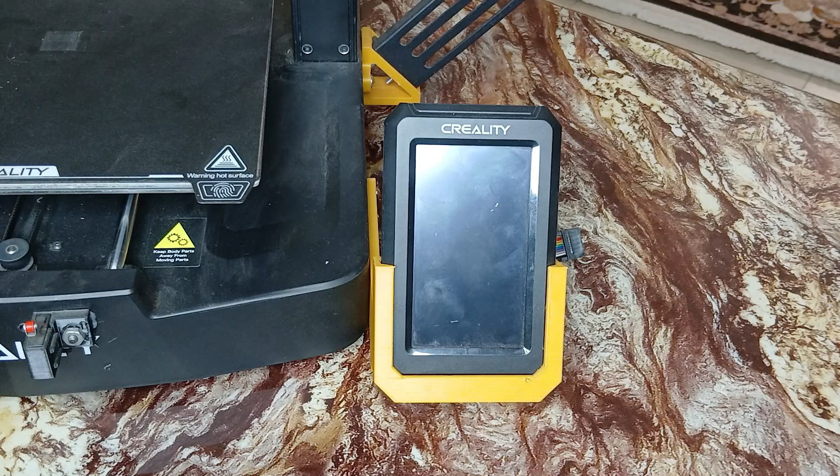In a previous video, I was showing you this mount I designed for the Nebula touchscreen for my Ender-3 V3 SE. But then I decided to come back to the stock firmware, meaning that I had to use again this stock screen, this TFT screen. So I designed this mount which I can use for this stock screen.

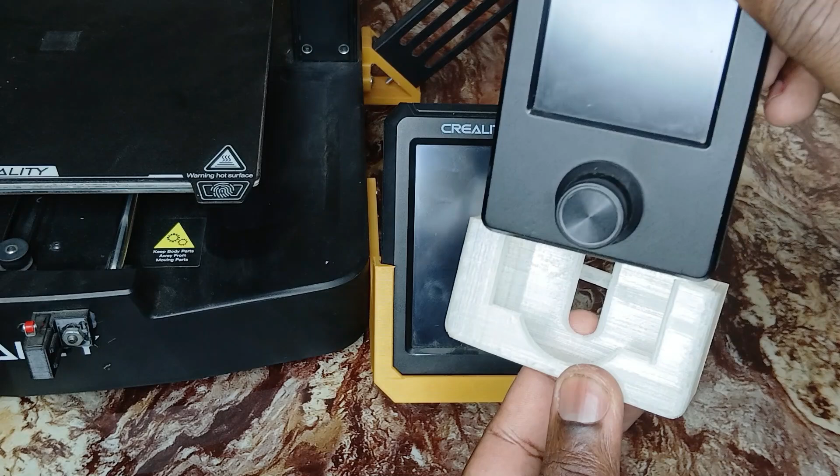But for some reasons, I decided to shift again and again. And each time I needed to unscrew the first mount and screw in place the second mount and so on. Of course, at a certain moment it became a little bit boring. That's why I decided to put aside this mount here, this one, and then I designed this new one for the TFT screen.

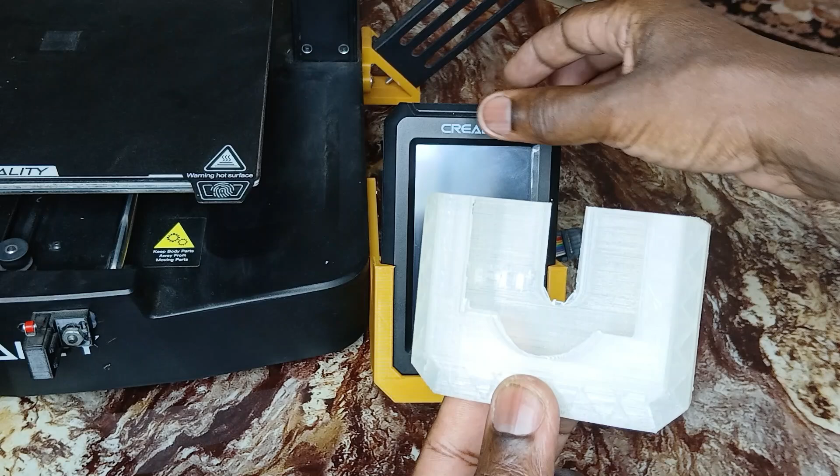Now, the way it works is very simple. I just remove the touch screen. I keep in place this mount, but then I will insert this one here. And then I can put my TFT screen. That's very easy, very simple.

Now, if I no longer want to use this TFT screen, I just pull it out. I remove this mount, and then I put my touch screen. As you can see, that's very simple.

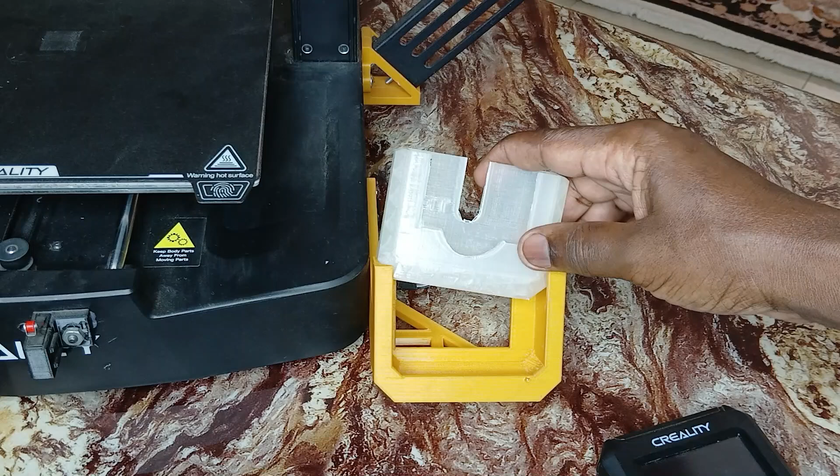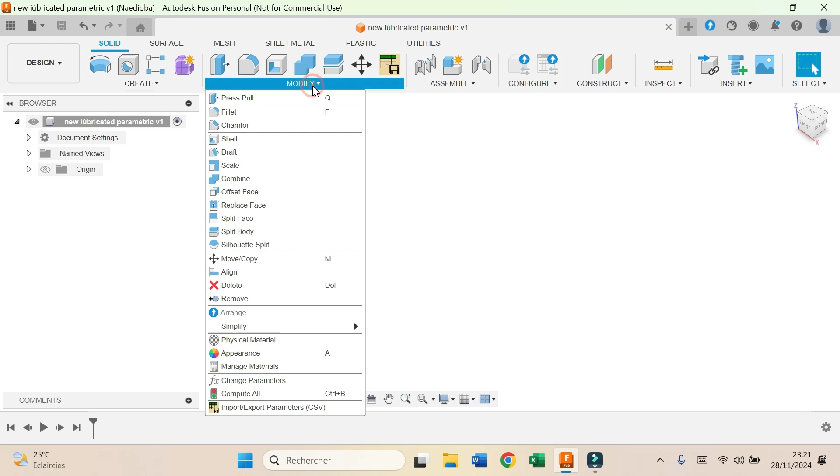Okay, now I'm going to show you how I designed this mount. First, I open Fusion 360. Now, before starting the sketch, I'm going to create a few parameters. The first parameter I'm going to create, I call it forAngle. This is the parameter that will handle the angle of the tilt of the screen. I choose no units and I type in 50.

The second parameter I'm going to create is the angle. And here I'm going to use if statements. I type in if, parenthesis, forAngle is inferior to 40, semicolon, 40. This means that the minimum angle allowed for the tilt of the screen is 40 degrees. If the angle is less than 40 degrees, it immediately puts it to 40 degrees.

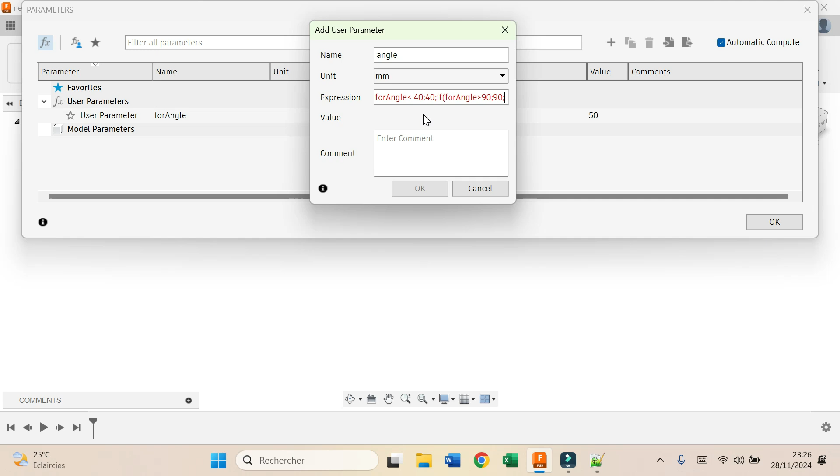Then I type in again if, parenthesis, forAngle is superior to 90, semicolon, 90. This means that the maximum angle allowed is 90 degrees. Else, in all other cases, the angle is equal to the value we type in the parameter forAngle. So I type in forAngle here and I close the parenthesis.

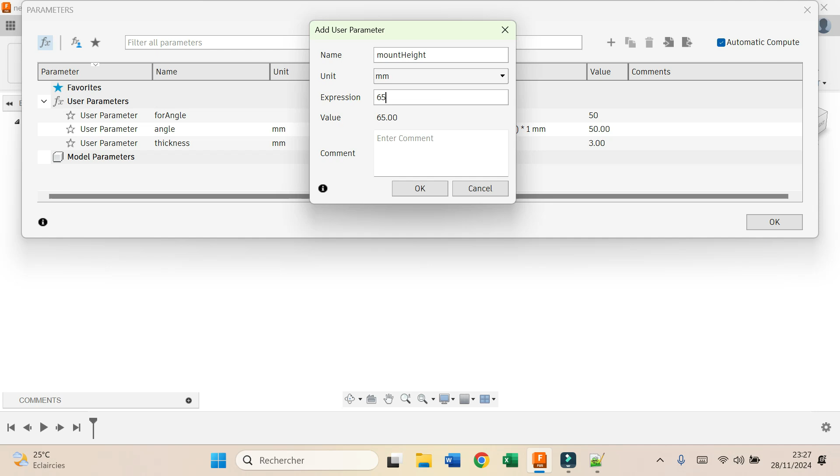Now the next parameter is the thickness of the mount, thickness. And I type in 3 millimeters. The next parameter is the mountHeight. I type in 65 millimeters. You type in 65 millimeters. Okay.

Now another parameter is the ribPlane, that is the height of the construction plane on which I will create the rib that will strengthen the mount. I will call it ribPlane, and here also I will use an if statement. I type in if, parenthesis, the angle is inferior to 50 degrees,

the height of the plane would be the mountHeight times 0.75, that is 75% of the height, semicolon. Otherwise, the height of the plane is equal to half the mountHeight. So I type mountHeight divided by 2. Now I can close the parenthesis. Okay.

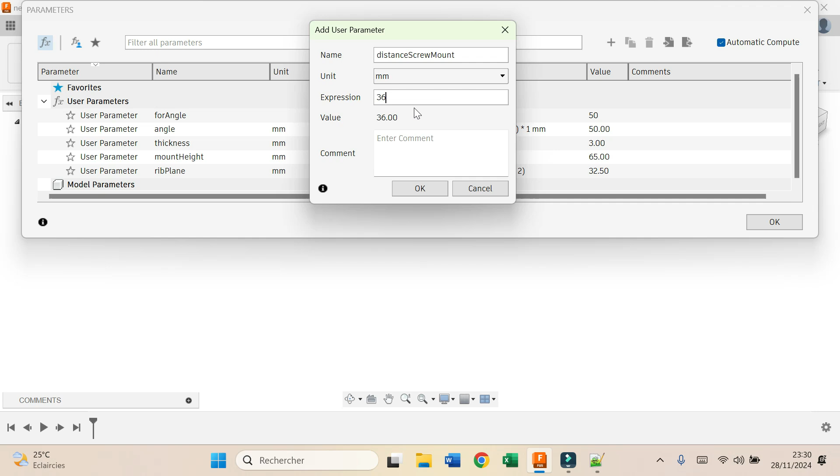And the last parameter I will create, I will call it distanceScrewMount. This parameter will handle the length of the screw bracket. If I want to have it longer or shorter, it depends on this parameter. So here I will type 36 millimeters, and now I can finish the parameters.

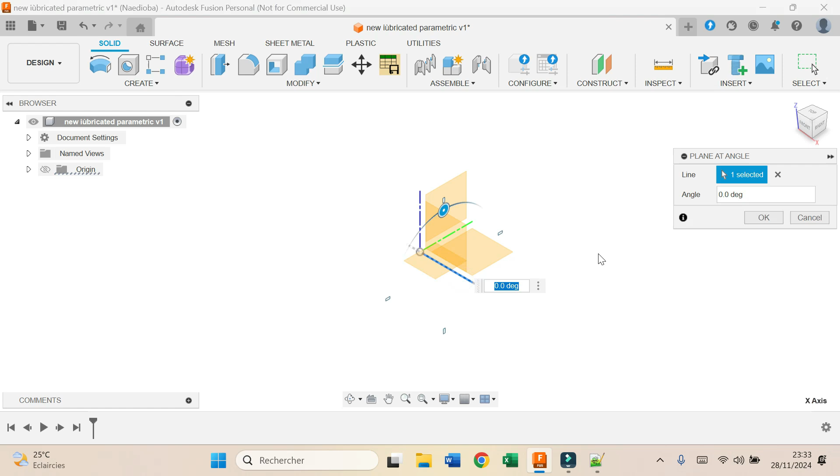Okay, now I will create a plane at an angle. I select the x-axis and I choose angle in the parameters, that is 50 degrees. I click OK. Now I create a sketch on this plane. I draw a rectangle. I show the origins. I make these two lines symmetric around this axis and these two symmetric around this axis.

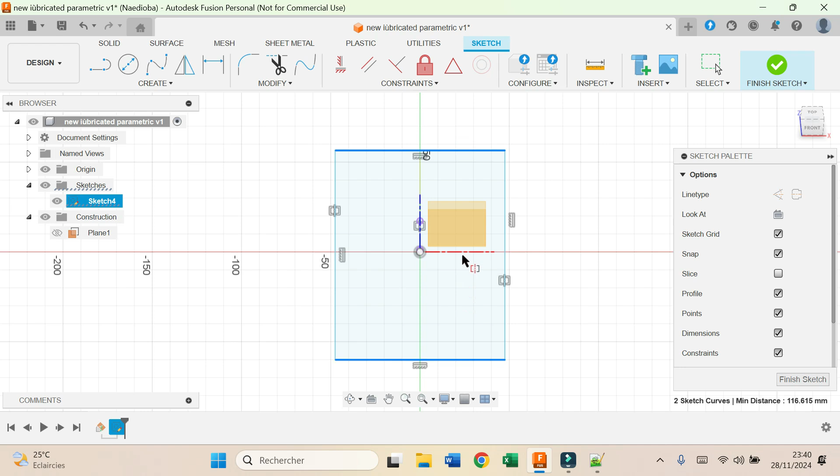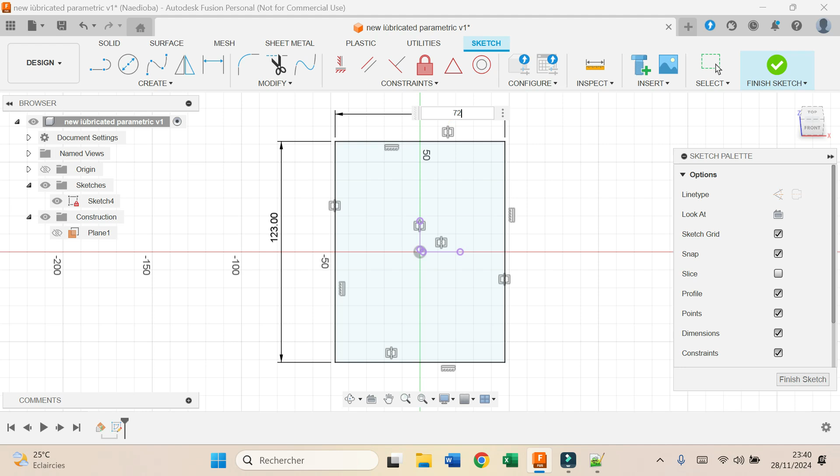Now between these two lines I type in 123 millimeters, and between these two I type in 72 millimeters. I select chamfer, equal distance. I choose this corner, I type in 5 millimeters. I do the same here and here and here. Okay. Now I can finish the sketch.

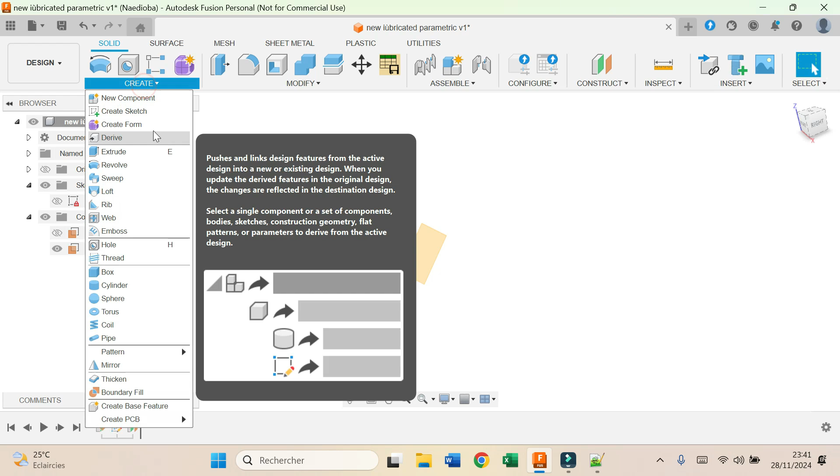I display the first plane. Now I create an offset plane starting from this plane here, 5 millimeters up. Now I have the first plane and the first sketch, and I create a sketch on the second plane. I draw a rectangle. I display the origins. I make these lines symmetric around this line and these two symmetric around this one.

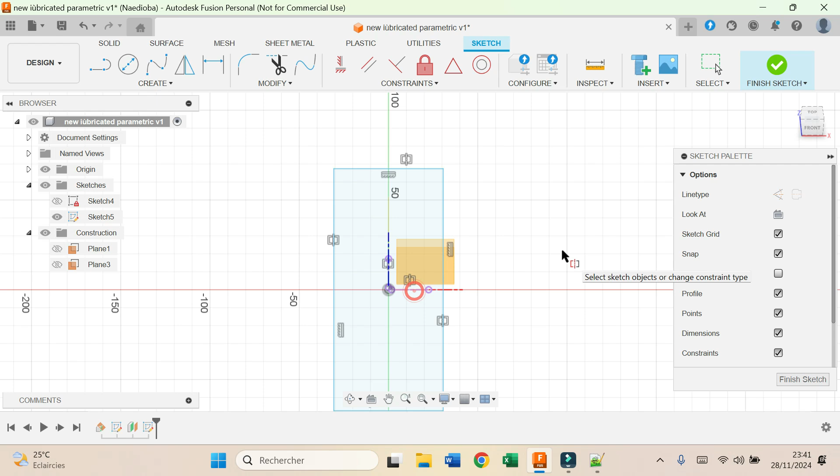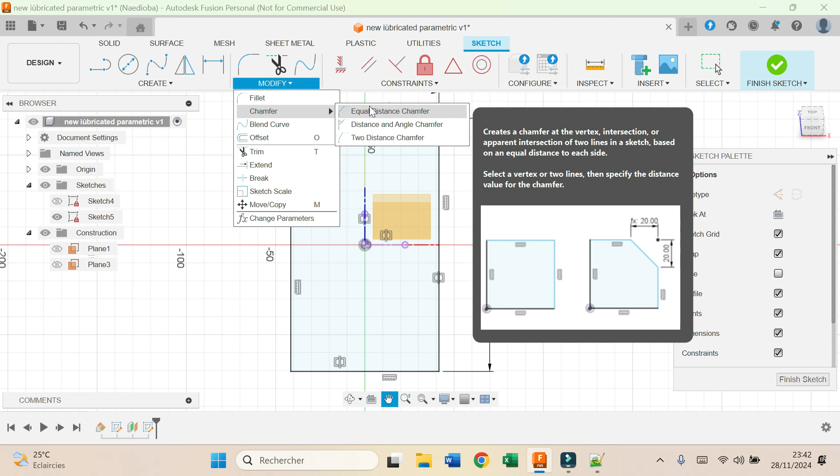Now between these two lines, I type in 141, and between these two I type in 83. Now I choose chamfer, equal distance. I select this corner, I type in 8 millimeters. Then I can choose the other corners. There it is.

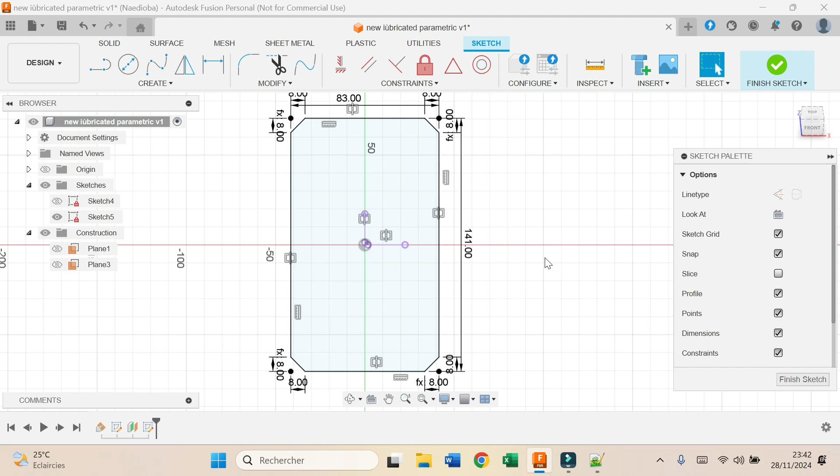Now I can finish the sketch. I display the first sketch. Now I select loft and I select the two sketches, this one, this one, and I click OK. This is the first body.

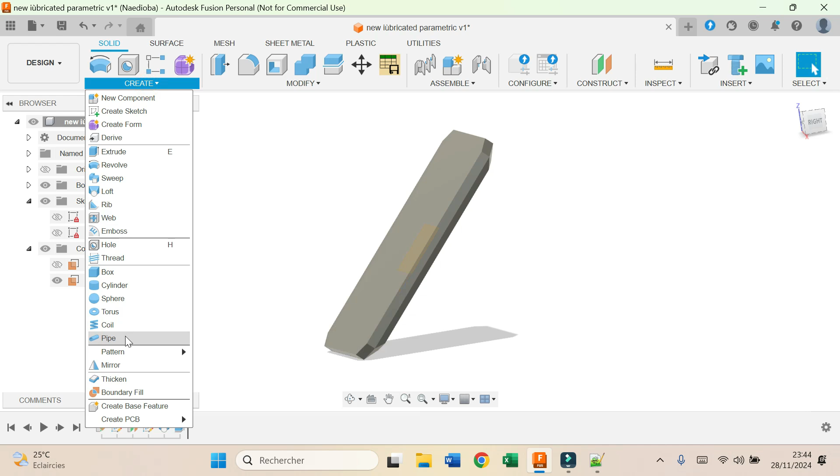Now I select extrude. I select the top face and I type in 5.5 millimeters. Okay. Now I select mirror. I choose bodies. I select this body. For the mirror plane, I click on the top face here. For operation, I choose join and I click OK. And here we have a rough shape of the touch screen.

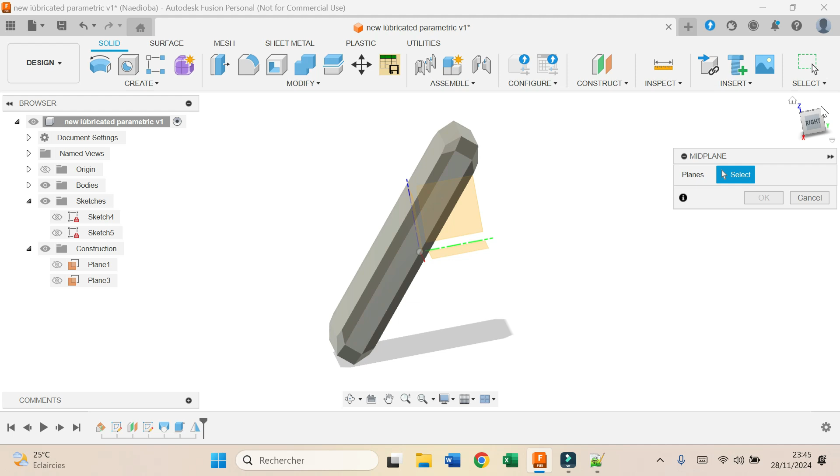Now I create a mid plane. I select this bottom face and this top face. I click OK. Now I create a sketch on this plane. I choose project. I select bodies and I click on this body here. I click OK. Now I can hide the body.

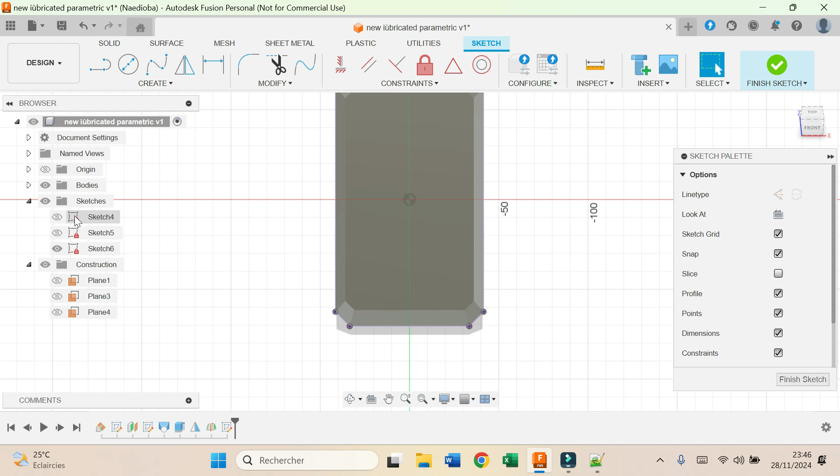I select offset. I make sure that chain selection is checked. I click on the line here and I type in minus thickness minus 0.3, that is 3.3 millimeters.

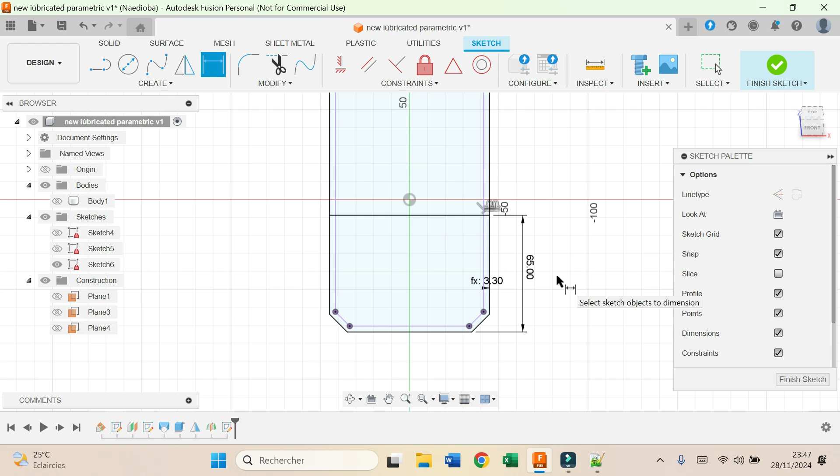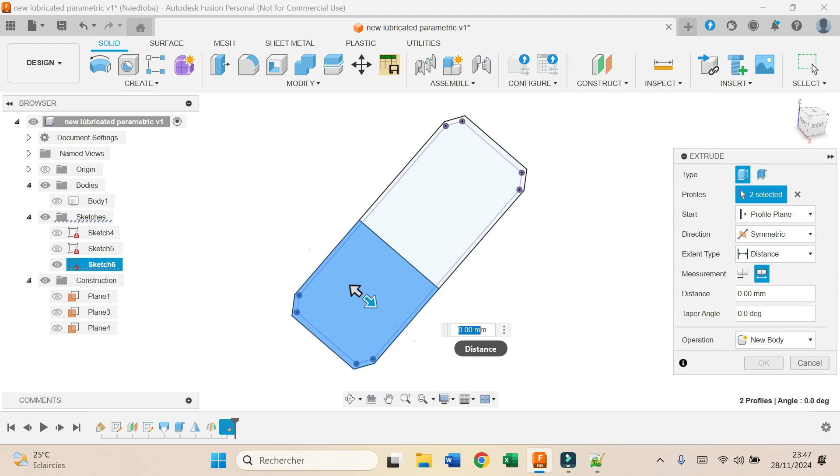Now I draw a line here, and between this line and the bottom line I type in 65 millimeters. Now I finish the sketch. I select extrude. I choose all these faces. For direction I choose symmetric. For measurement I select whole length and I type in 27 millimeters. For operation I choose new body and I click OK.

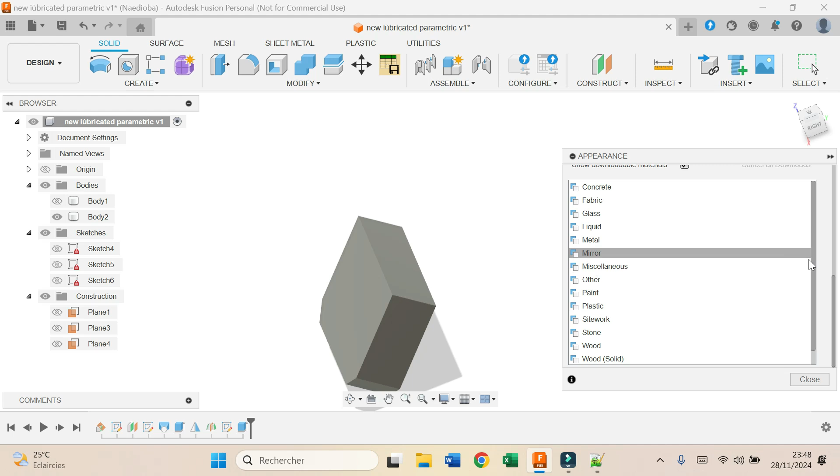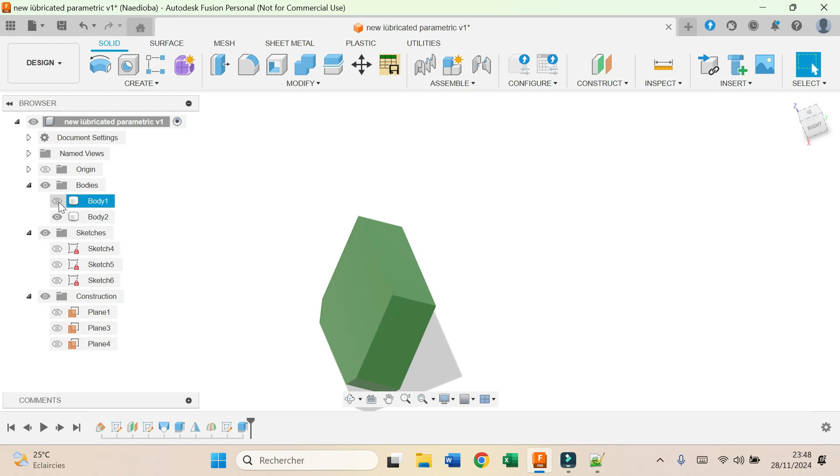I'm going to add colors to distinguish. Okay. Now I have my two bodies here.

Now I'm going to select combine. For target body I select this body, body number 2. For tool body I select the screen. For operation I select cut. I make sure that keep tools is checked and I click OK. Okay, now if I hide the first body, you will see that it is cut.

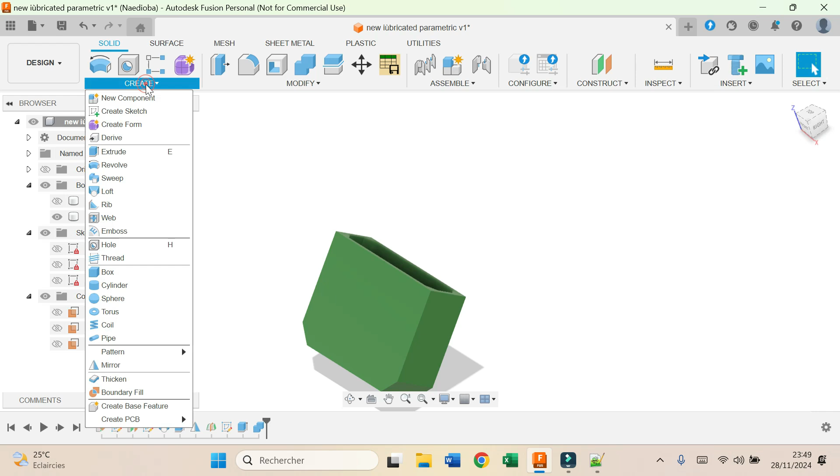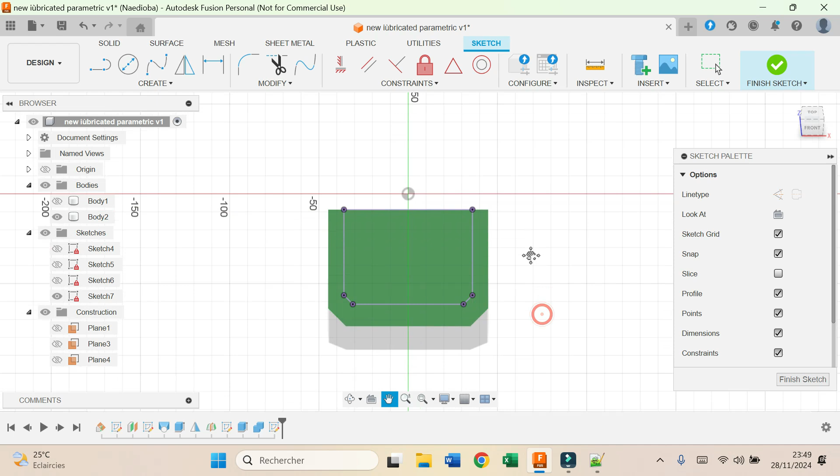Now I create a sketch on this face. I select project and I click on the internal face here. I click OK. Now I can finish the sketch. I select extrude, I select this face and I click on the other face. Okay, there we go.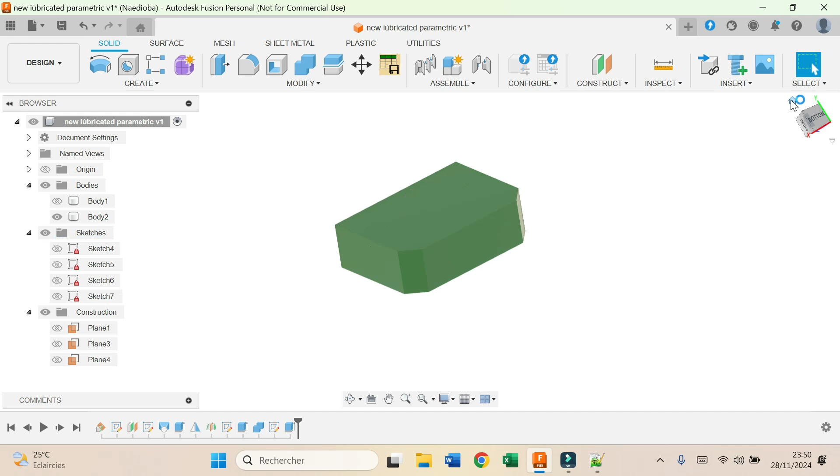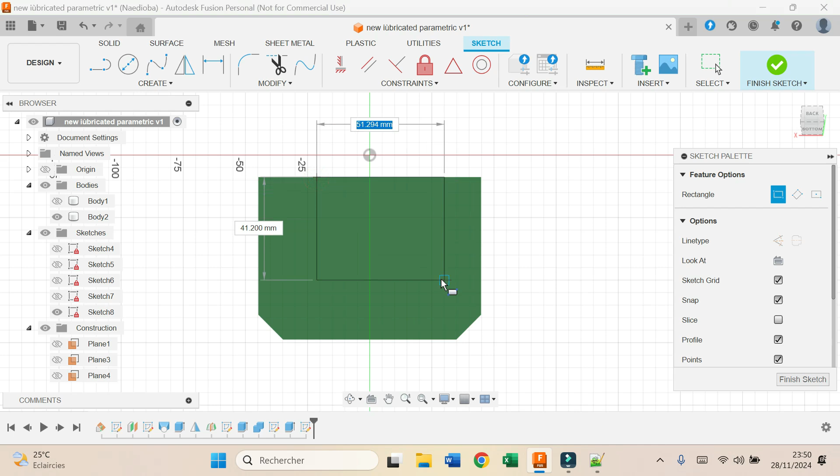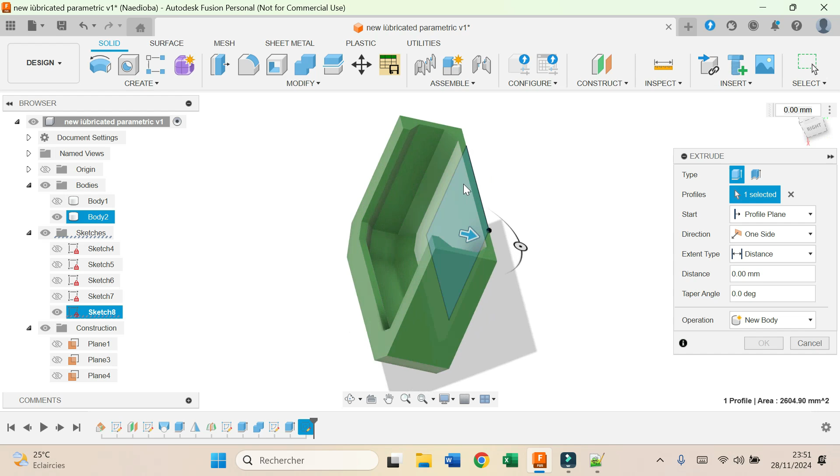Now I create a sketch at the back. I draw a rectangle starting from here. For the distance between this line and this line on this side, I type in 11.8 millimeters. Between this line and the edge here, I type in 20.8, and between this line and the bottom, I type in 19.3. Okay, now I can finish the sketch. I select extrude, I select this part and I click on the other face. Okay.

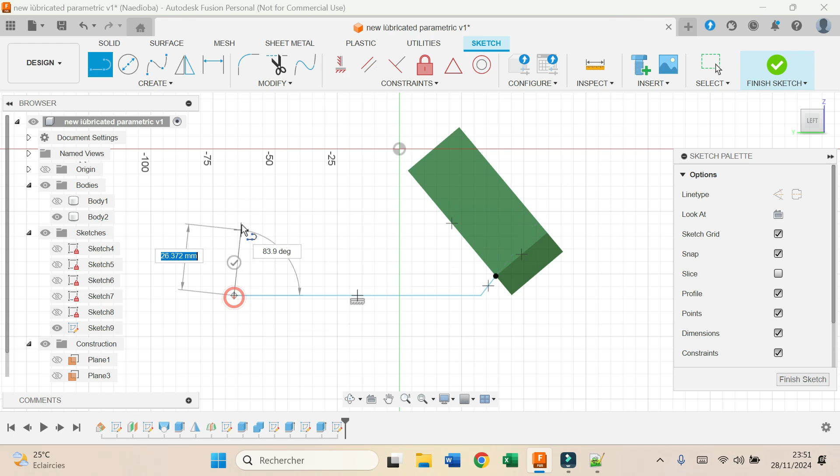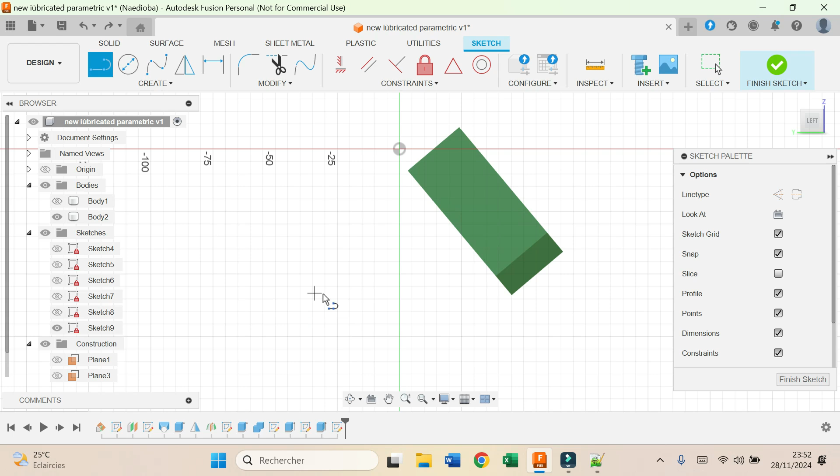Now I create a sketch on the left face here. Now I draw a first line. Now I draw a few lines like this. I make these two horizontal and this one vertical. I also make sure that this point is at the same position as this one. Now between these 2 points I type in 9 millimeters.

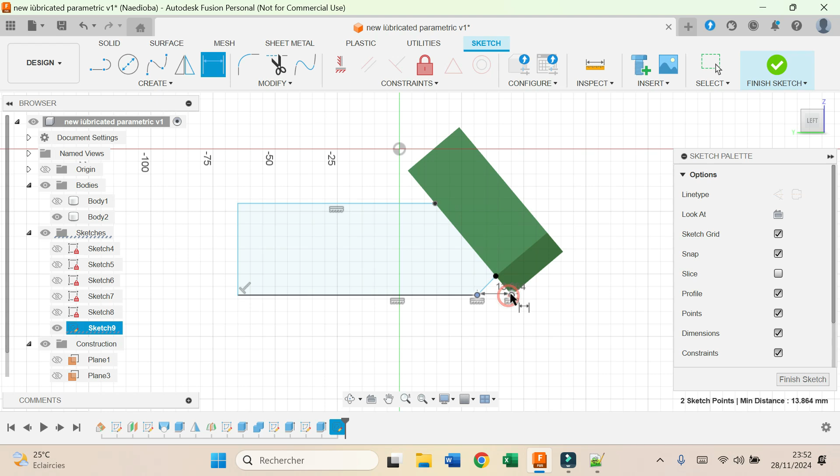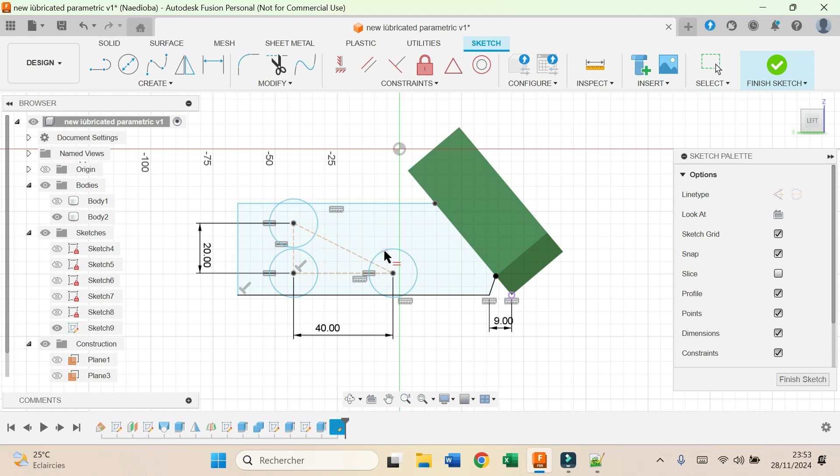Now I draw a triangle like this. I make the lines construction lines. For this line I type in 40 millimeters. Here I type in 20 millimeters. Then I select circle. I draw 3 circles here on the corners of the triangle. I make all circles equal. Now for the diameter I type in 5.5 millimeters. There we go.

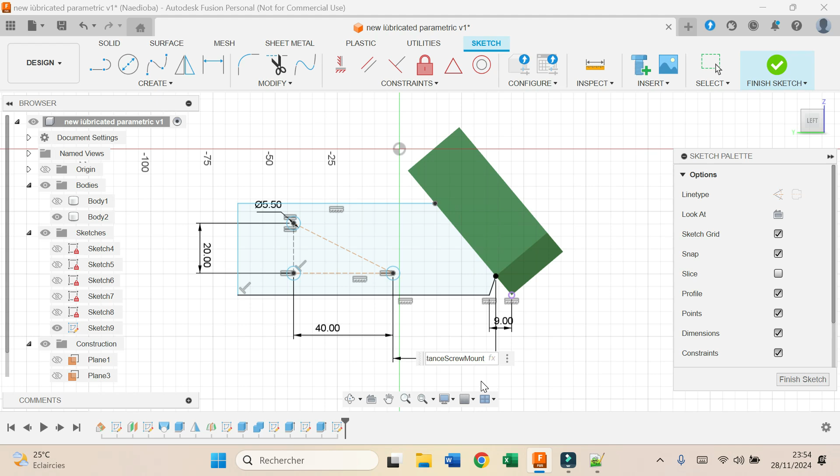Now between the first circle and this point I choose the value that I put in the parameter, that is the distance between the screw and the mount, 36. Now between this line and this one, I type in 8 millimeters. Between this line and this one, also I type in 8 millimeters. Between the circle and this line, I type in 7 millimeters.

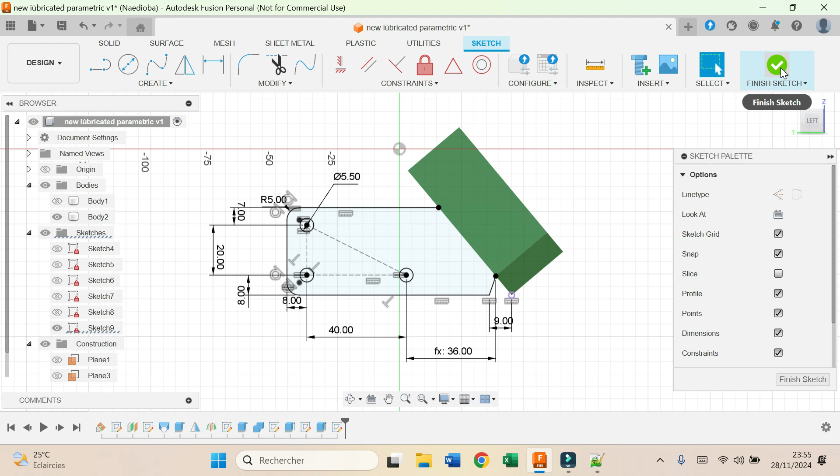Now I choose fillet. I select this corner and I type in 5 millimeters. I select this corner also, I type in 5 millimeters. Okay. And that's done for this sketch. Now I can finish the sketch. I choose extrude. I select this part and I type in -5. For operation, I select join. I click OK.

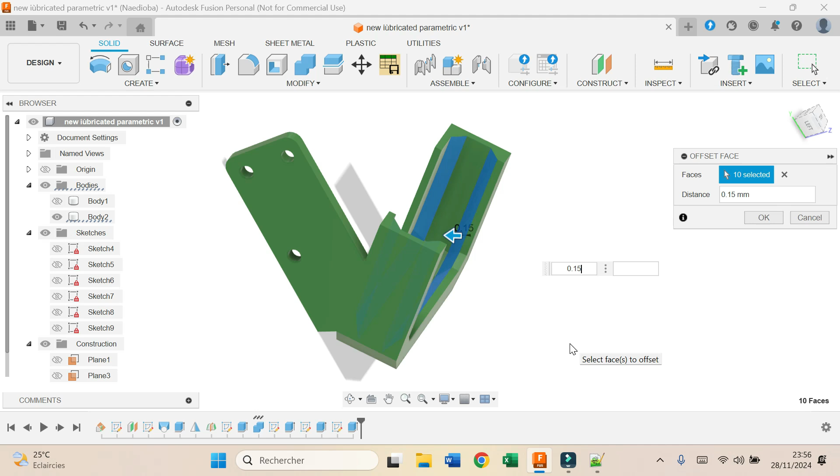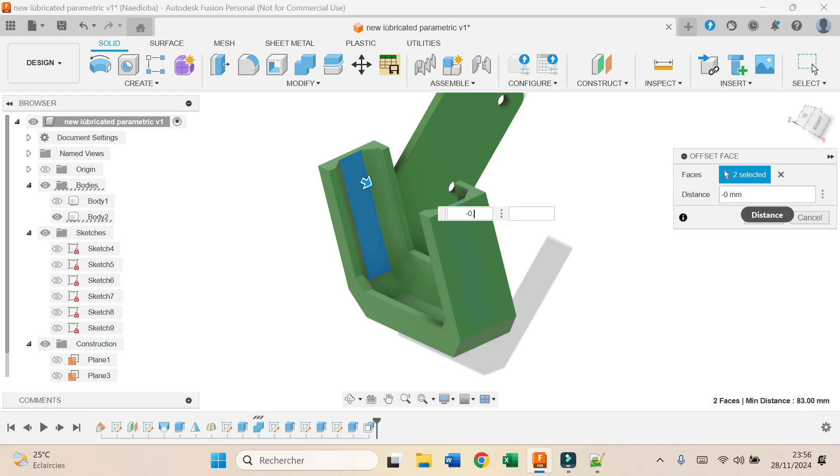I will choose offset faces. I select this face, this one, this one, this one, this one, also on the other side, this one, this one, this one, this one and this one, and I type in 0.15 millimeters. I choose offset faces again. I select this face and this one, and I type in -0.15 millimeters. And the mount is ready. Okay.

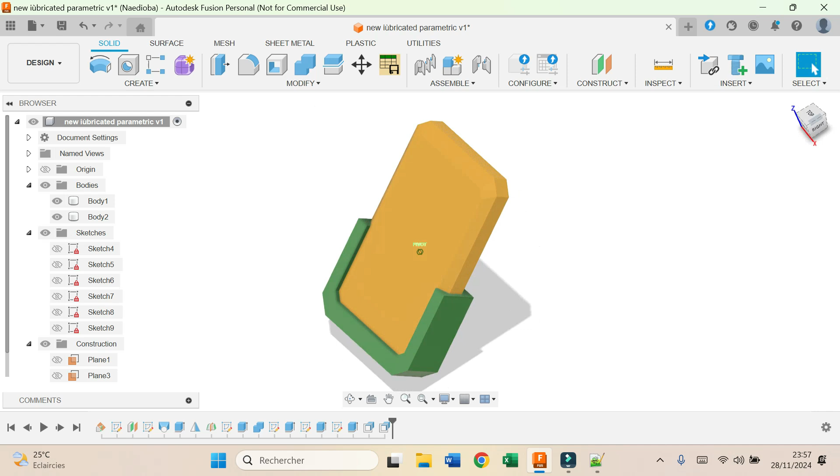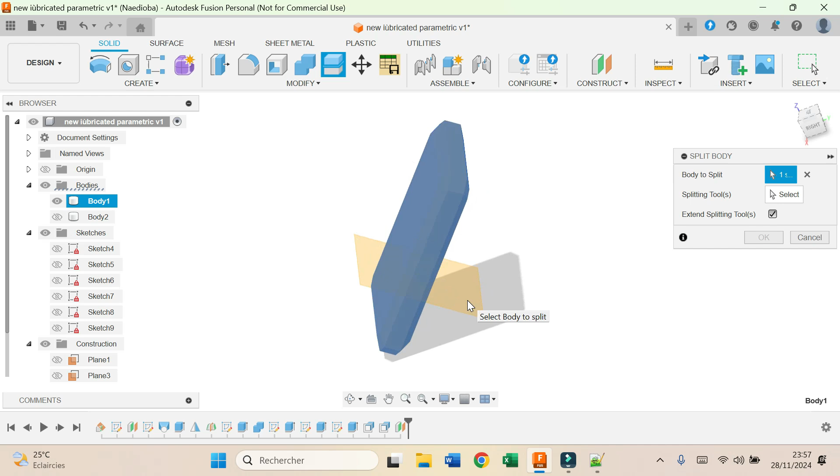Now I'm going to create an offset plane. I click on the top face here, click OK. Now I can hide the second body. Now I choose split body. I select this one, and for the splitting tool I select this plane here, I click OK. Now we have two bodies here. Now I can delete the top body.

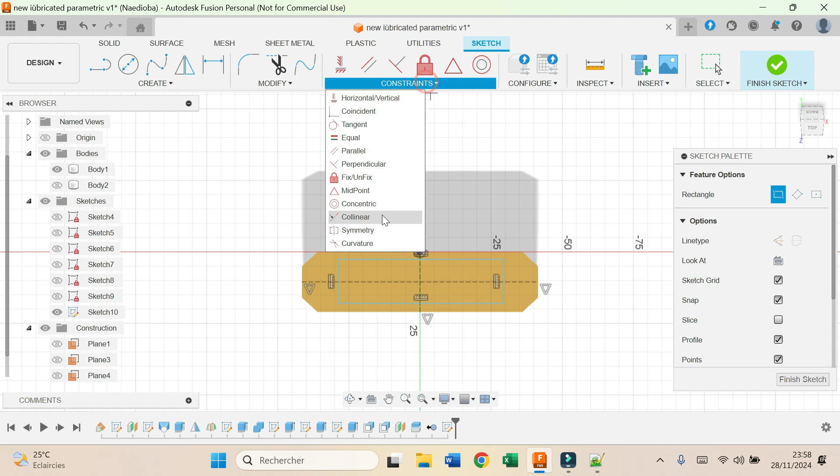Okay, now create a sketch on this top face here. I draw a center line here, then here, and I make them construction lines. I draw a rectangle. I make these two lines symmetric around this line here, and these two lines symmetric around this line.

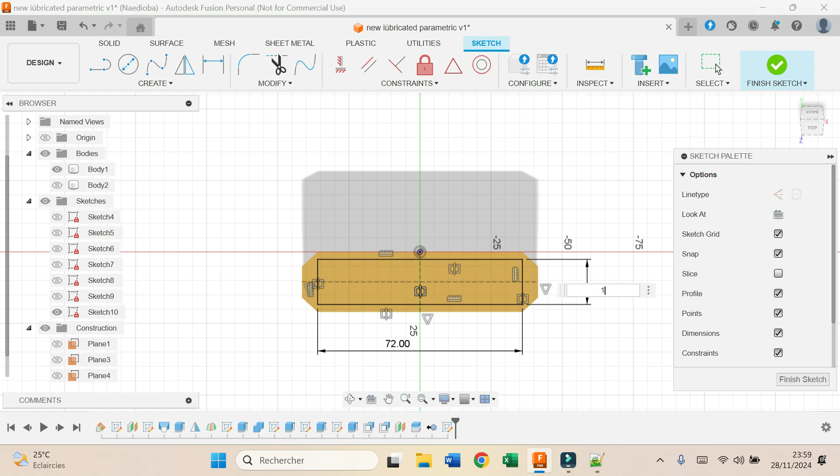Now for the distance between these two lines, I type in 72 millimeters. And the distance between these two, I type in 17 millimeters. Now I can finish the sketch. I select extrude, I choose this face, and I type in -50 millimeters. For operation, I choose cut and I click OK.

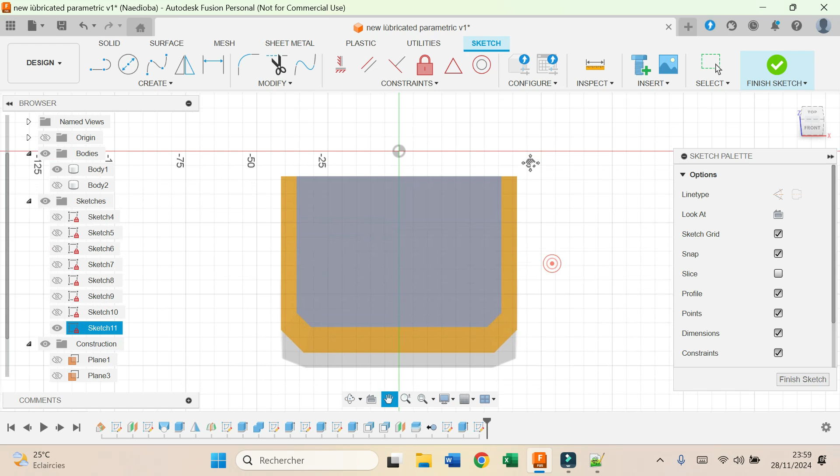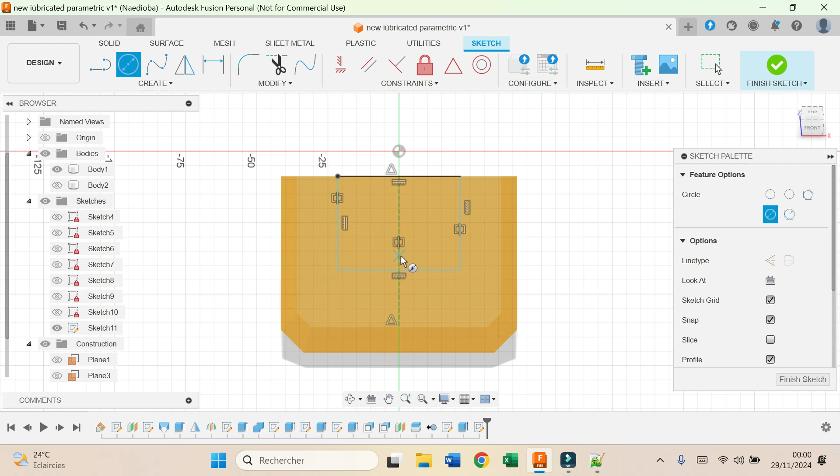Now I create a sketch on this front face. I draw a center line here, and I make it a construction line. I draw a rectangle here. I make the two lines symmetric around this center line here. Now I draw a circle on the line here. For the diameter of this circle, I type in 33 millimeters.

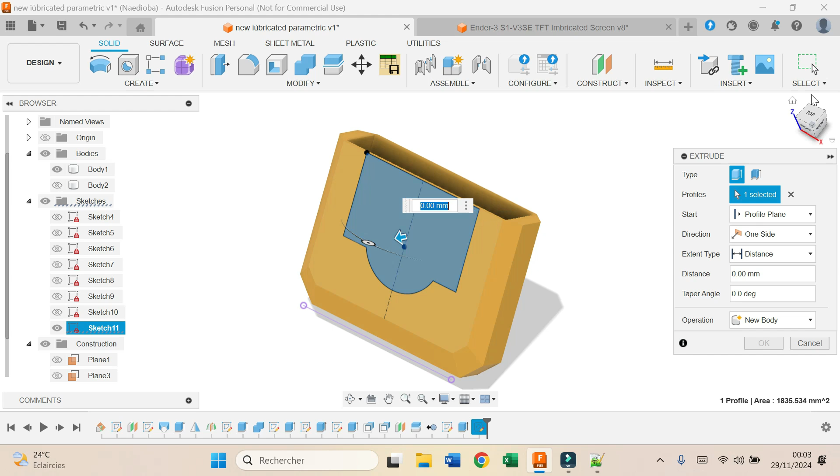The distance between these two lines is 51 millimeters. Between this line and the bottom, 30 millimeters. Now between the center of the circle and this line, I type in 6.5 millimeters. Now I can trim these parts here, this line and this line. Now I can finish the sketch. I select this face, I choose extrude, and I click on the other side. Okay.

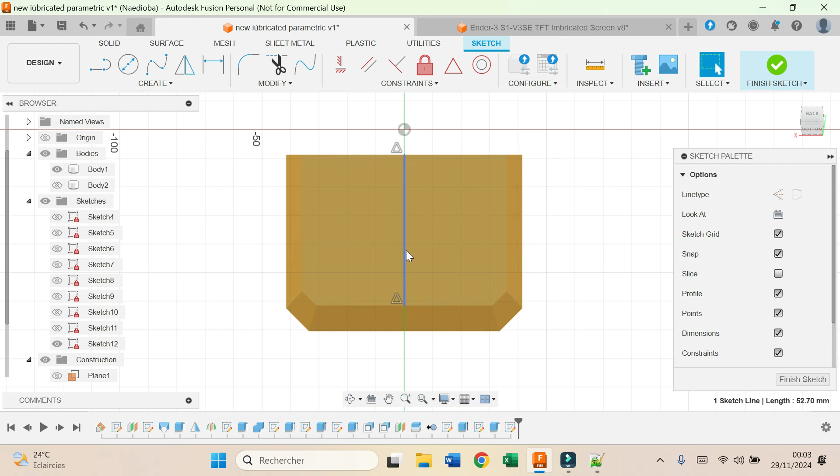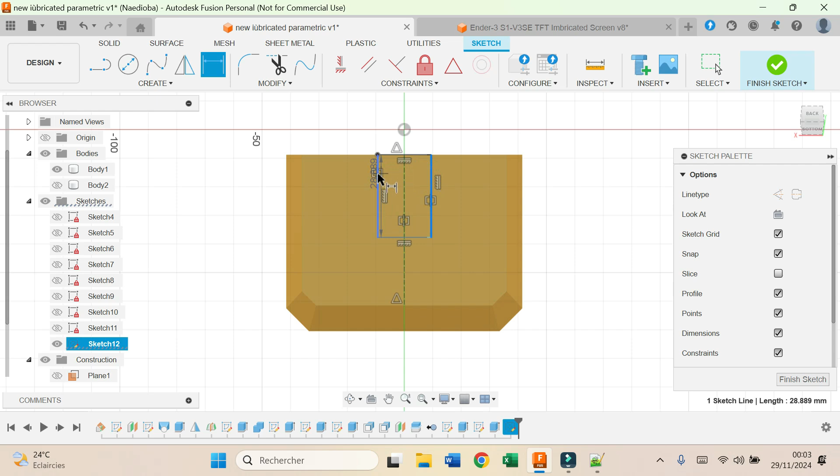Now I create a sketch at the back here. Again, I draw a center line here. I make it a construction line. Now I draw a rectangle here. I make a line symmetric around this line. For the distance, I type in 12 millimeters. For the height, I type in 25.

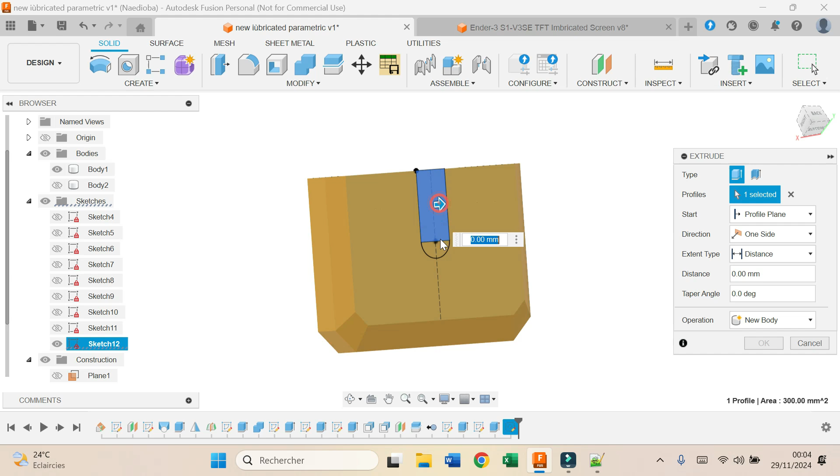Now I create a tangent arc. I click here and here. I finish the sketch. I select extrude. I choose these two faces and I click at the back.

Now I create an offset plane. I select the bottom face here. Now for the distance, I type in minus ribPlane. Remember, I put the ribPlane in the parameters. I type it in and I click OK. I will create a sketch on this plane. I hide the first body. Now I choose project. I select this body and I click OK. Now I can hide the body.

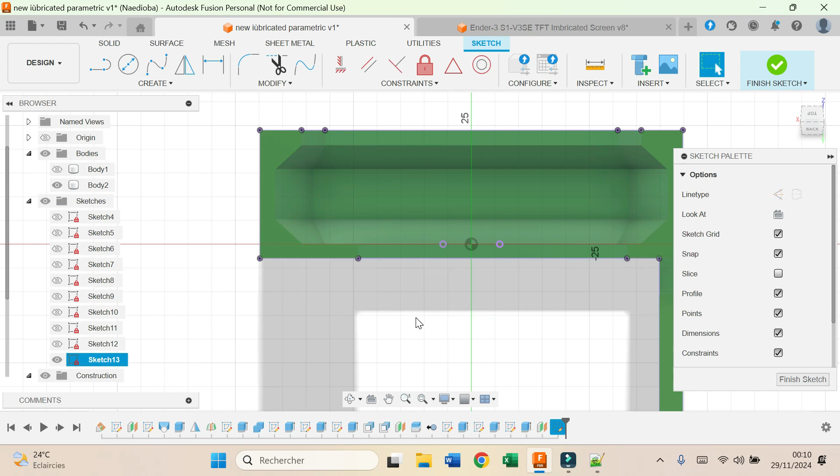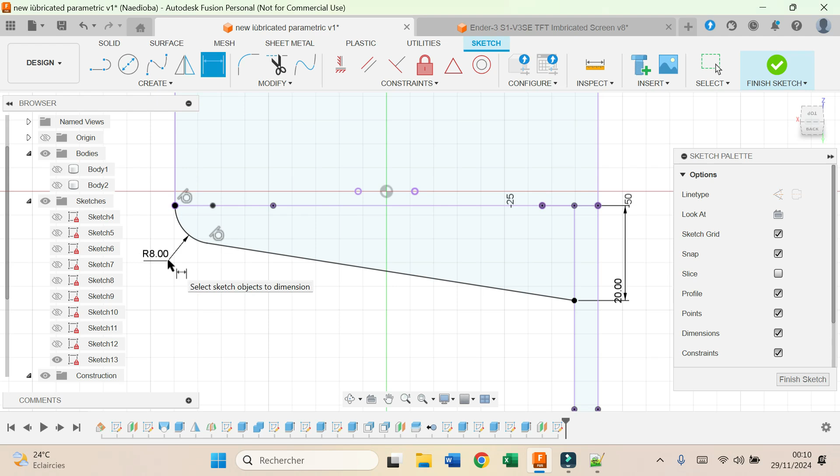Now I draw a line like this and then I create an arc. I make sure that this arc is tangent with this line. Now for the distance between this point and this point, I type in 20 millimeters. And for the radius of the arc, I type in 8 millimeters. Now I display the first body. I choose project. I select specified entities and then I click on this line here and on this one. Click OK.

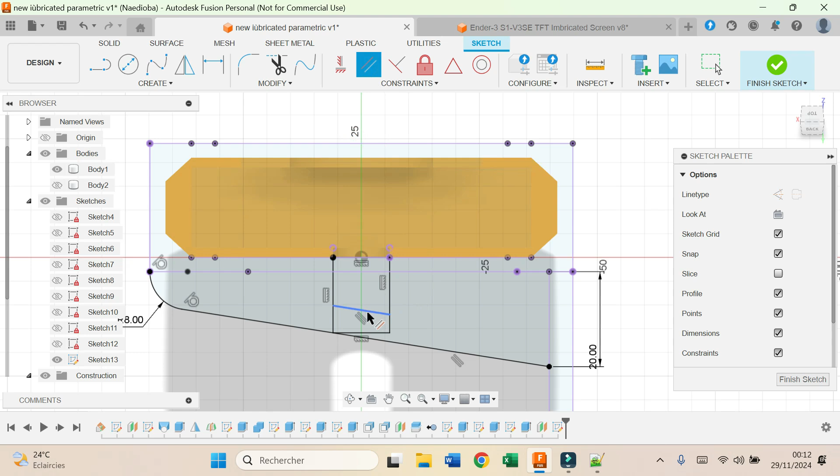Now I draw a rectangle starting from this point. I make this line coincident with this one. I make this point coincident with this one here. Now I draw another line here. I make it parallel to this one. The distance between these two, I type in 3 millimeters. Now I can trim this part, and this part.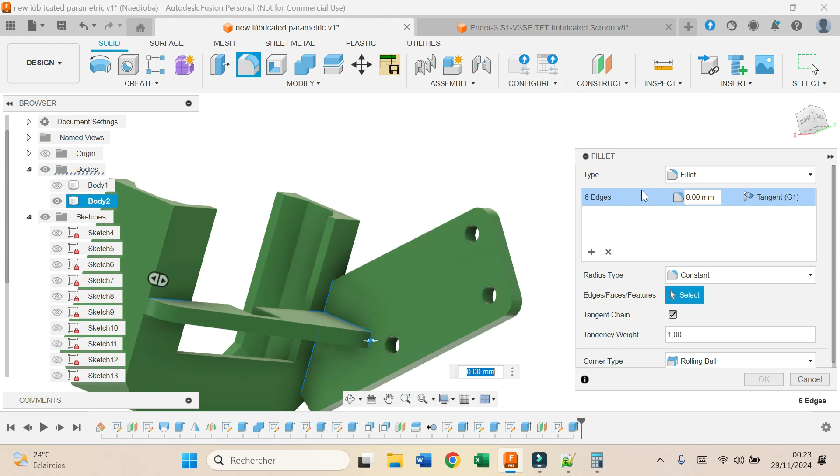I finish the sketch. Now I display the second body. I select extrude. I select this surface and I type in 5 millimeters. Join for operation, I click OK. Okay, now I choose fillet. I select this face, this line, this one here, this one, this one at the bottom, this one, and this one here, and I type in 2 millimeters.

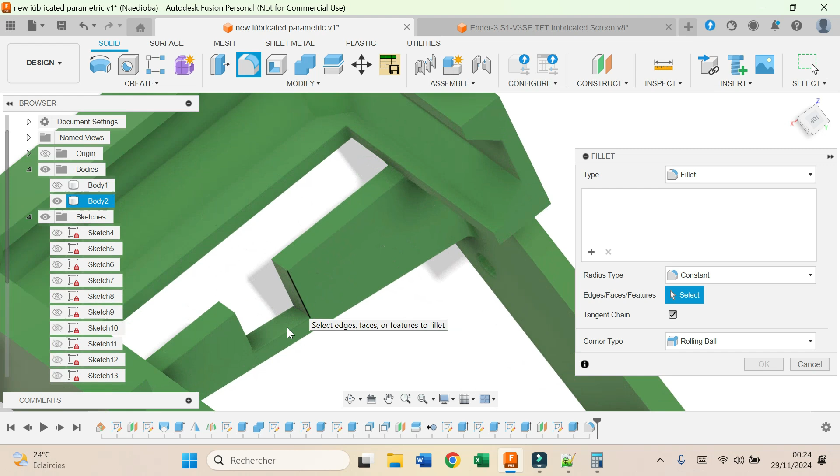I select fillet again. I select this line here. This one, and this one inside. I type in 2 millimeters. And I come back to the first body.

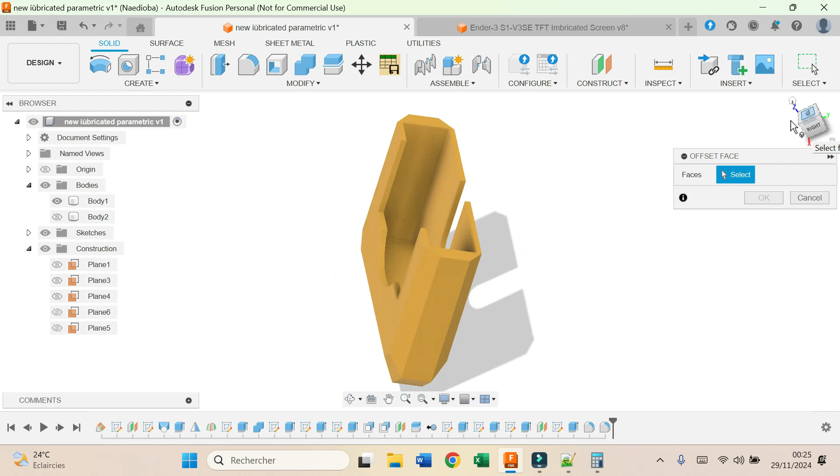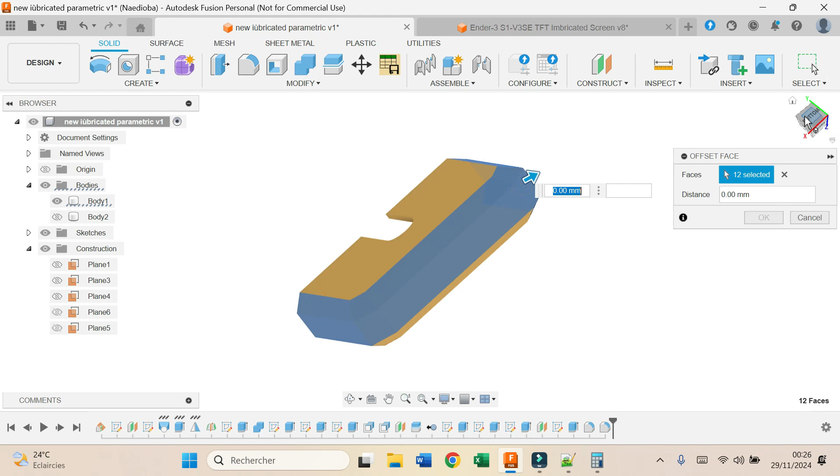I choose offset faces. I select this face here, this one, then this one, also here, and here, all these faces. And now I type in minus 0.5. Okay. Now I display both bodies.

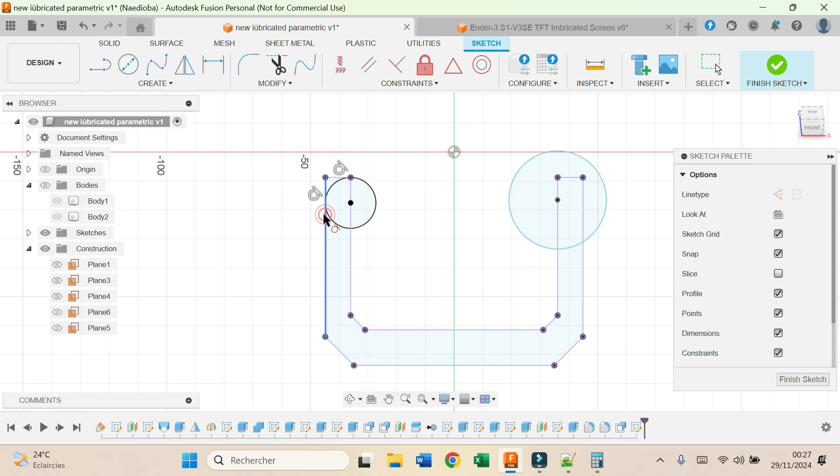I create a sketch on this face here. I select project. I click on this body. I click OK. Now I hide the bodies. I draw 2 circles, one on this line, another one on this line. I make the circle tangent to this line, another to this line. I do the same here. Now I can finish the sketch.

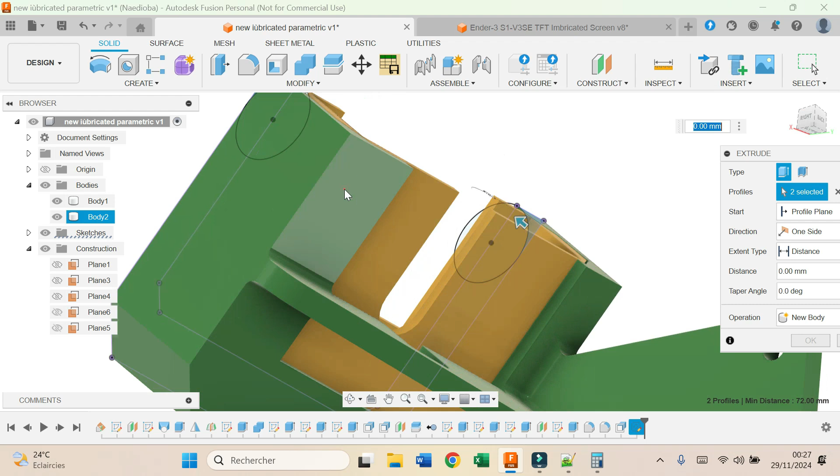I display the bodies. I select extrude. I choose this part, this part here and this part, and then I click at the back of the body to cut it. And there it is. Our mounts are ready. Okay, so we're going to name them.

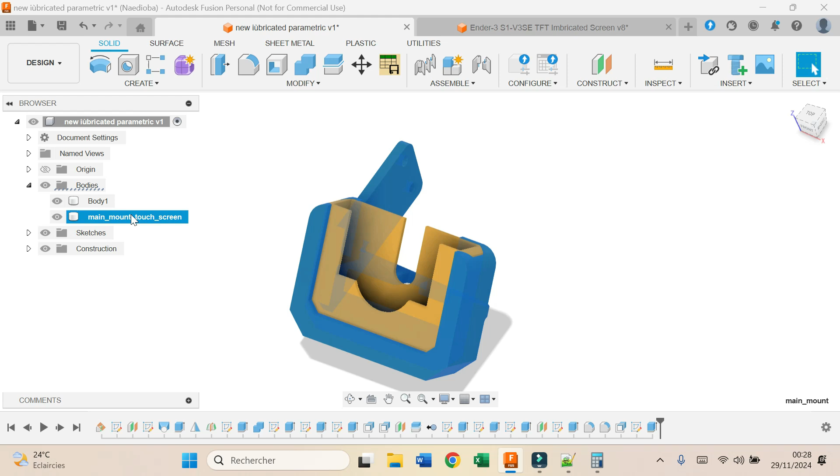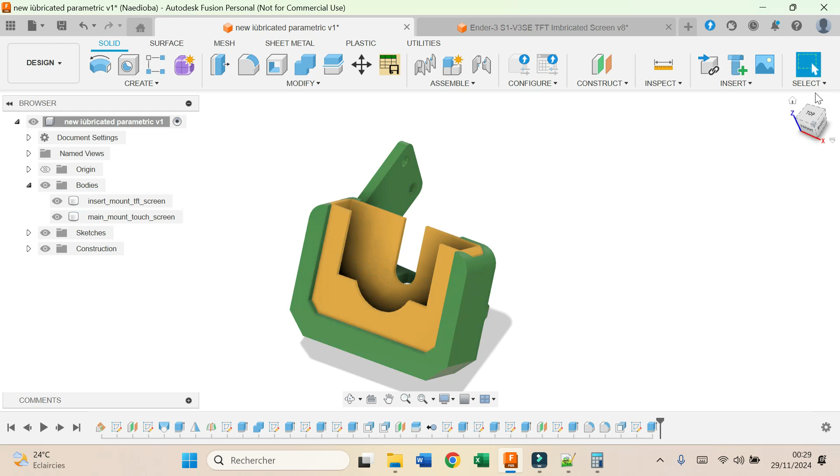Okay, this one I'll call it main mount touch screen. And this one I call it insert mount TFT screen. Now I can save the bodies. And now we can go to the printer.

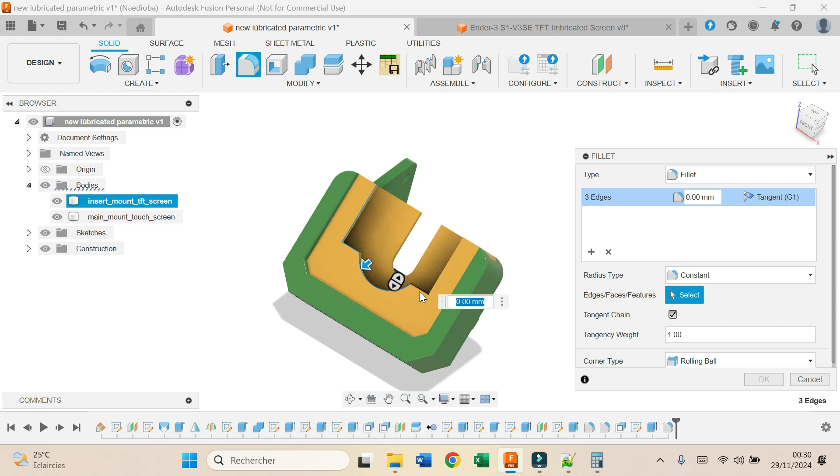But before that I will add fillets here and here. I choose 1 millimeter. I will do the same here. I will do the same here, and here. I type in 1 millimeter.